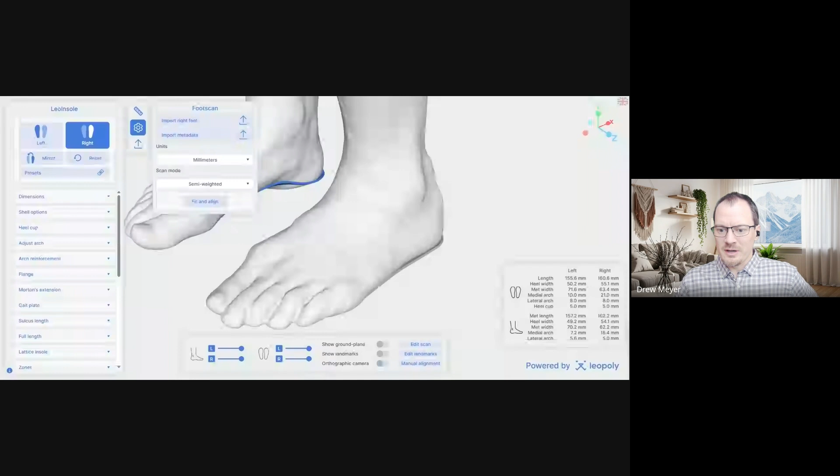For those of you not familiar with LeoInsole, I'll give a quick run through of the layout. I've imported a pair of foot and leg scans using the import dialog. It's really important to pick the unit of measurement for that scan file and also how the scan was taken. These were taken in a semi-weighted position, and then I'll double check the landmarks and make sure they're in the right location, because sometimes the automatic detection algorithm will miss one or two, and we want those landmarks in the right spot for the best success possible. Now that my foot scans are in, oriented, and all the landmarks are in the right spot, I can start designing.

One thing most customers start with is a preset. You can save any settings and make it your own preset, and import that later with the import yours feature here. I'm going to start with one of our presets to get things going.

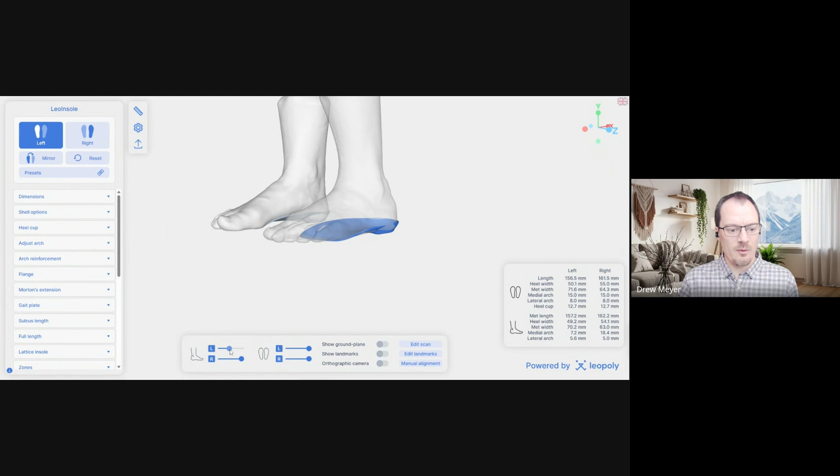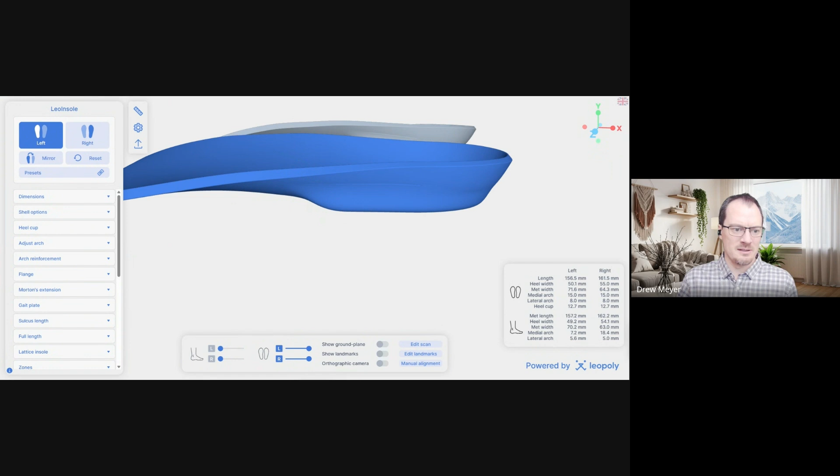This will highlight one of the new features that's been available for a couple of weeks now, which is the blended heel post. You can see we have this nice transition that's now a blended feature. It used to be a sharp, 90-degree transition like this, and it would fracture, especially on printed devices. This was big feedback from users saying, stop making this a 90-degree transition, we want a nice smooth round over here. So now with the new updates, there's this blended heel post, and anytime you add a post, it's going to have a nice blend to it as well.

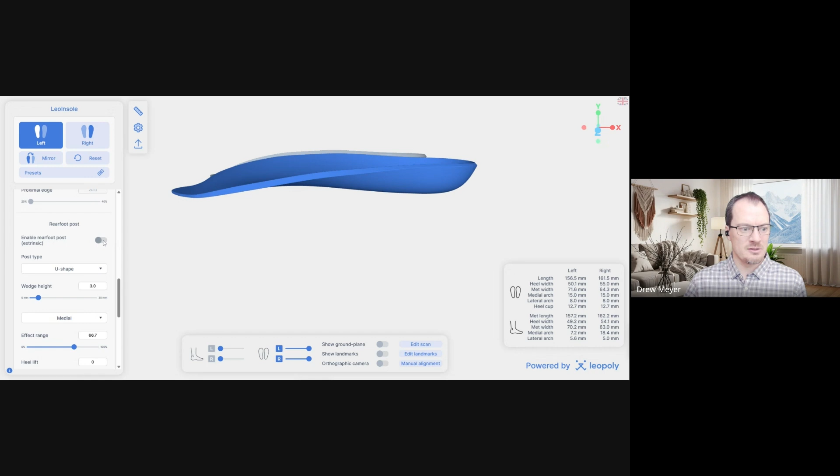This is located down in the foot posting category. I have a rear foot post activated, so if I turn that on and off you'll see what's going on. There are multiple shapes available here - this is the U shape, and you can also do it with a full block shape, which will also have the transition. Any of the half posts will also have that transition. This is one I'm really excited about for the 3D printing crowd especially, and it's going to show up on any of the heel posts. So now we have nice blended heel posts.

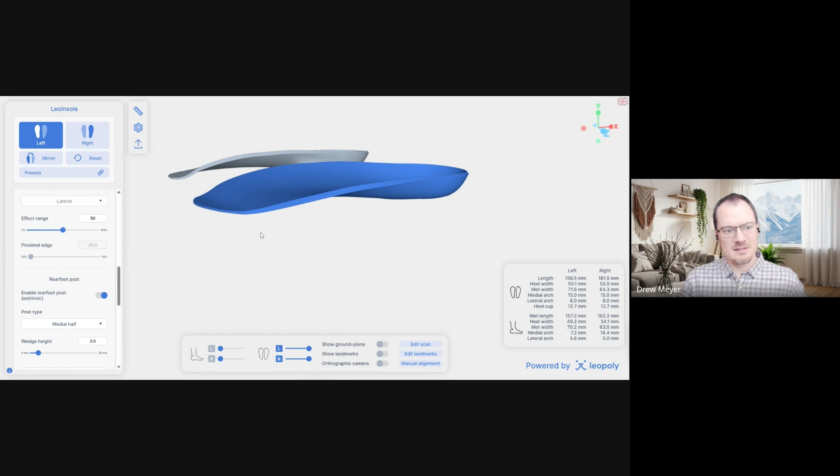All right, so for the rest of the features, I'm really excited to introduce some new things that have been added into the Dimensions tab here. So in the Dimensions tab, what we have are a couple of new features.

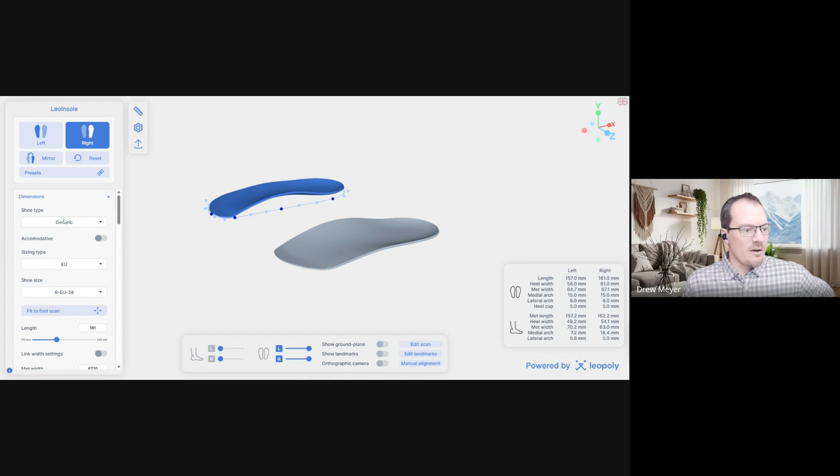The first one you'll notice is when I open the Dimensions tab, all of a sudden this outline shows up and these control points will show up as well. This is the ability to adjust the contours, the perimeter of the device.

This feature has actually been around for a couple of weeks now. Some of you guys may have noticed it if you're heavy LeoInsole users currently. These control points allow you to modify the shape of the device manually.

The first release of this allowed for only the top surface. So the clinical surface facing the foot was the first iteration of this tool.

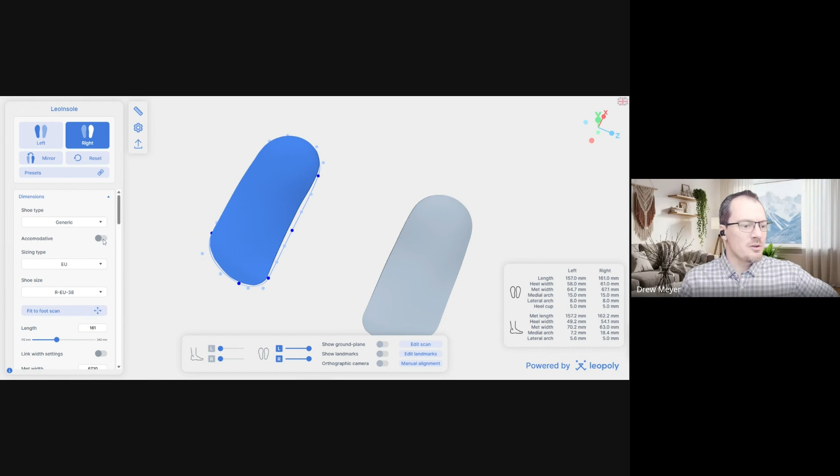But I'm really excited now we have the ability to, when you go into accommodative mode - so this is also a new change for us as well - accommodative mode is going to replace what was previously called the thick insole setting.

So think of this as the thick insole tool. You turn on accommodative mode, and now you get the thick insole.

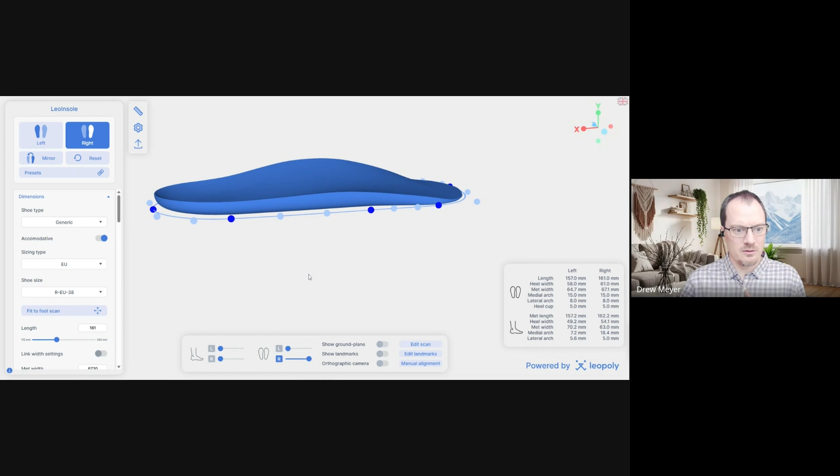I'm going to hide the other side here so we can just see this one. So when I turn on and off accommodative, it's basically that thick insole tool.

The other thing that will happen is you can see down here at the bottom, right now there's not a top and a bottom control. When I turn on accommodative, I now have contour editor top and bottom.

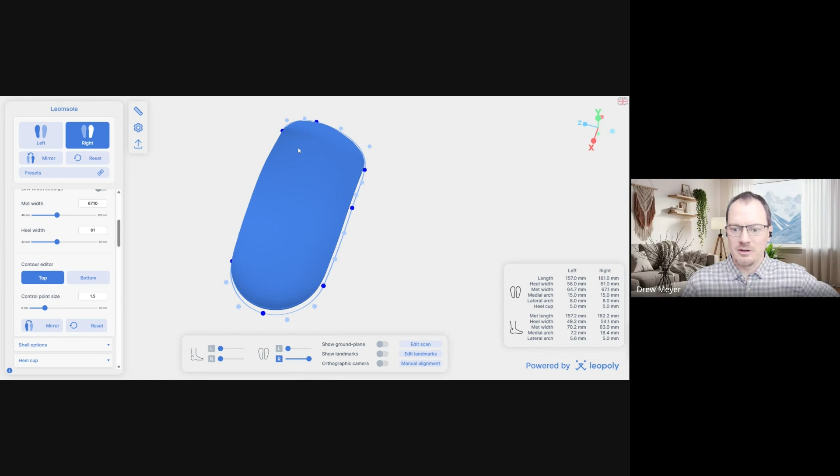So the top is going to use these control points to control the top facing clinical surface, the one that's touching the bottom of the foot.

The bottom, for those of you in the German market, this is going to be the brand sole. This is going to be the shoe-facing surface of the device.

So it will allow you to adjust the contours and how it transitions from that top clinical surface down to the surface that sits inside the shoe.

So this is really nice because now you can really finely control and you can grossly manipulate to match feet that don't really look like feet anymore. You can really manipulate the contours of this outline to match up with a foot.

One quick thing to point out is sometimes if you have a tiny little control point, it's really annoying and difficult to click on it.

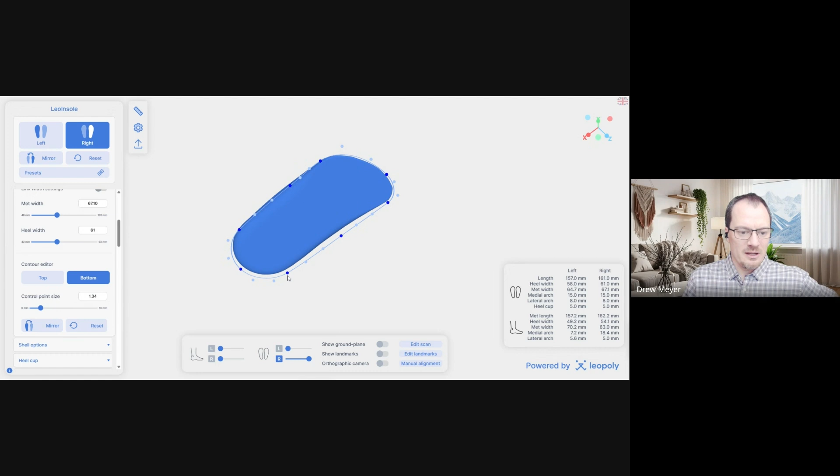So there is a control point size slider so that you can make the control points a little bit more easy to manage. Okay, let's jump into a real world situation.

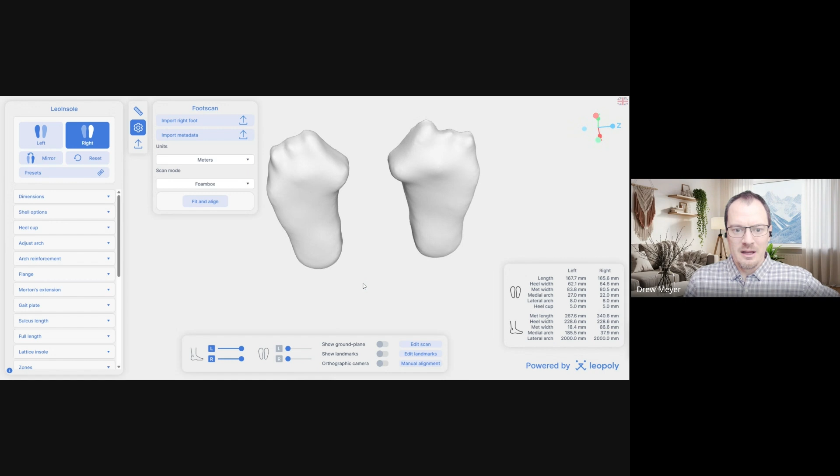I'm going to switch tabs here. And these feet don't match the typical foot profile anymore. We have a really extreme hallux valgus going on here, a really narrow heel and an extremely wide forefoot.

So historically speaking, this would have been a little difficult. You'd have to spend a lot of time with the forefoot width sliders to accommodate this.

Now what we can do, open up the Dimensions tab. I'm going to hide this side and just work on that right side. I can flip on accommodative mode. I'm also going to flip on full length mode. So this is kind of the template that we're working with now.

As you can see, as what typically happens with these really extreme hallux valgus situations, the great toe has translated so much and the width of the forefoot has increased so drastically that we have too much length and not enough width, although it's actually pretty close to start with.

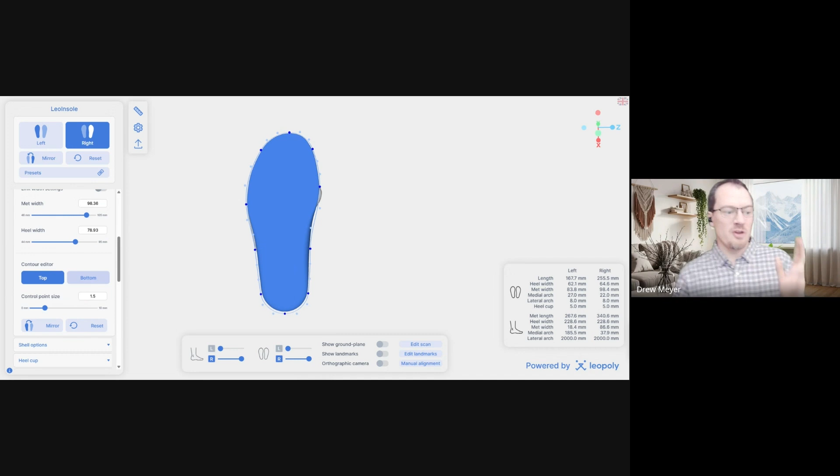So what I can do is go back into the Dimensions tab, and you want to be careful so that you know that you're editing either the top or the bottom surface. The top surface is going to be the one facing the foot - this is going to be the one that has to look like the foot.

So what I can do here is hide the outline and adjust the length of this to get to a more appropriate length. So let's say something more like that looks reasonable. And I want to make sure I'm in my perfect bottom view here.

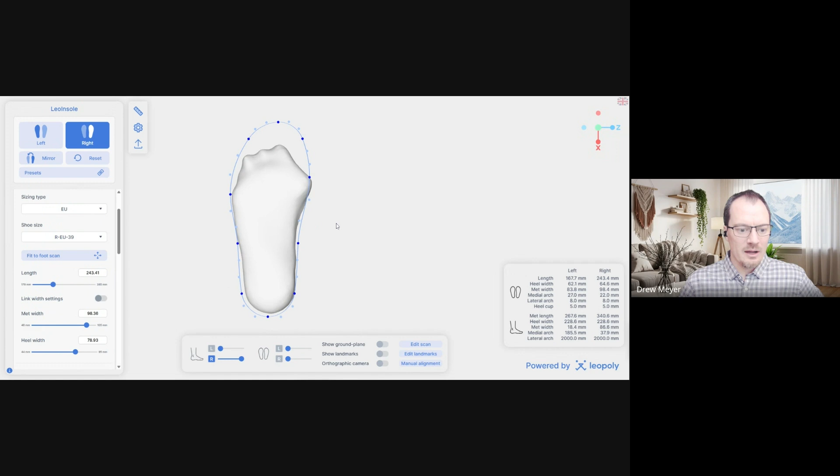And now I can start adjusting these control points. Sorry, it's going to run a little slow on the web call here. But I can start adjusting these control points.

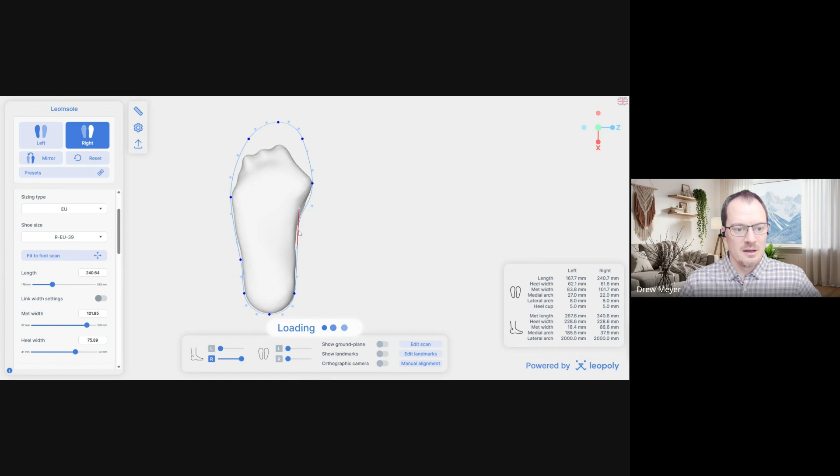So the dark blue points, I can relocate the outline, and the light blue points, I can change the rounding. If you guys are LeoAFO users, this is really similar to how the trimline tool, the outline tool, works in the LeoAFO space.

So now you can really customize the outline of this device to more appropriately match the actual foot. I can turn that back on, and now we can see that the overall contour matches the foot much better.

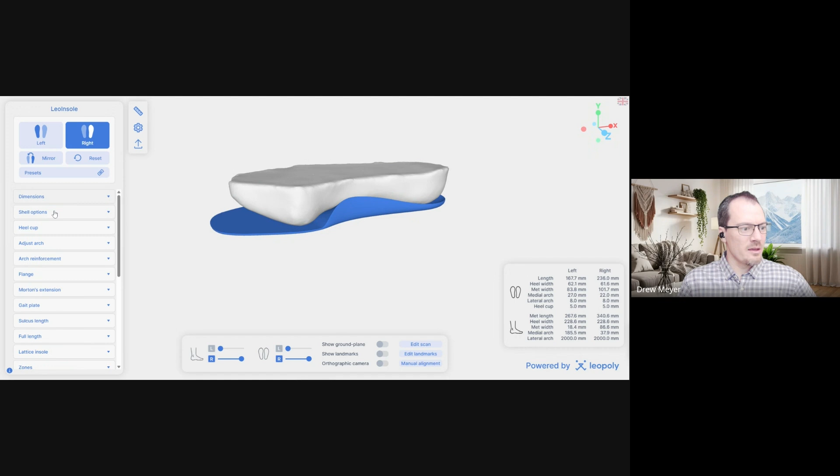Now let's say I was going to want to FDM print this. So I think I want to have a lot more thickness so that I can add some infill and make this nice and squishy for this particular patient. So I've added 8 mils, and 6 mils under the forefoot.

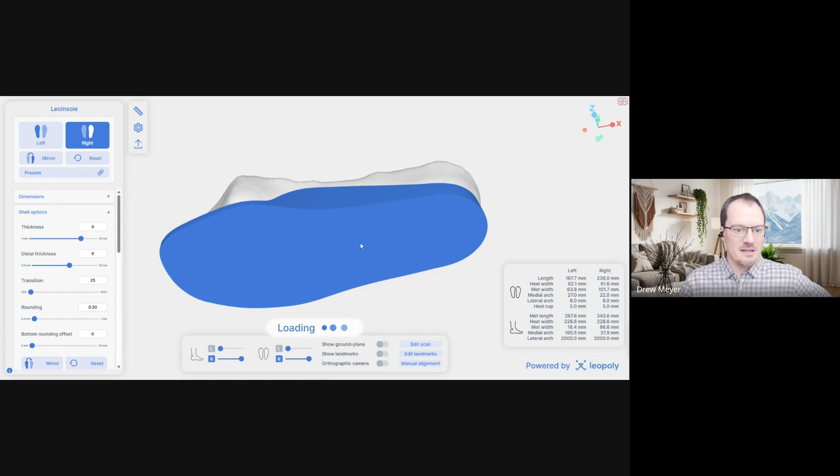Another new feature while I have this tab open is the bottom rounding offset. So if I set bottom rounding offset to 0, you're going to see that I have a square edge, and it goes all the way around the bottom of the device.

As I slowly bump that up, you'll see that it starts to break the edge, and then I can even do a really aggressive round over so that it has now rounded the edge, and it's going to fit into the shoe quite well.

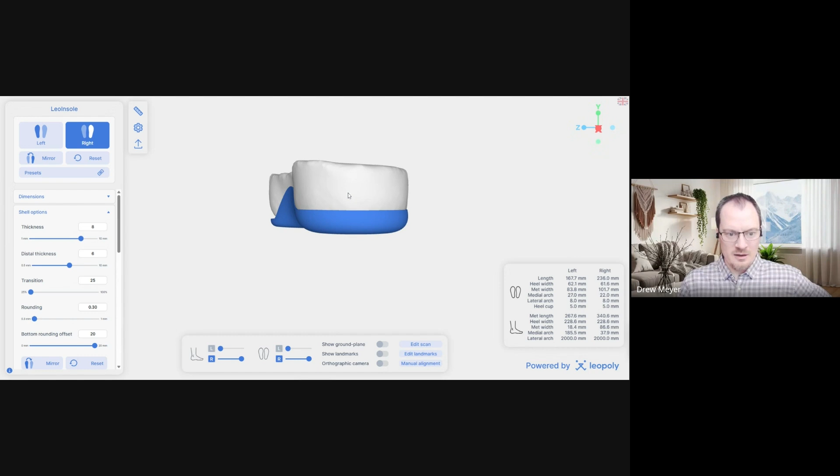So let's say I want to go maybe halfway, maintain some of that squareness and that support, but I'll keep a little bit of it so that it's not a complete square edge. So that's another new feature found under shell options.

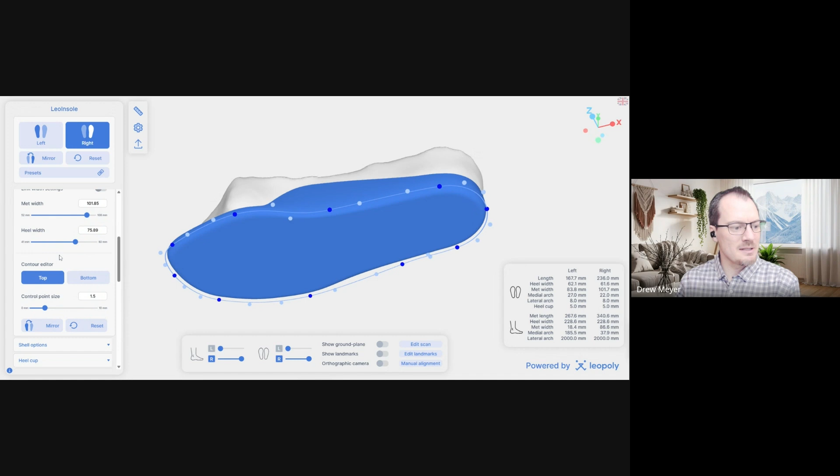If I go back into the dimensions tab, scroll back down to the contour editor feature, and now switch into bottom mode, I want to be in that bottom view, editing the bottom surface. You see now that the contour has changed when I switch back and forth.

So now I have 2 contour maps that are going to look really similar. One controls the top surface touching the foot, and the other controls the bottom going into the shoe.

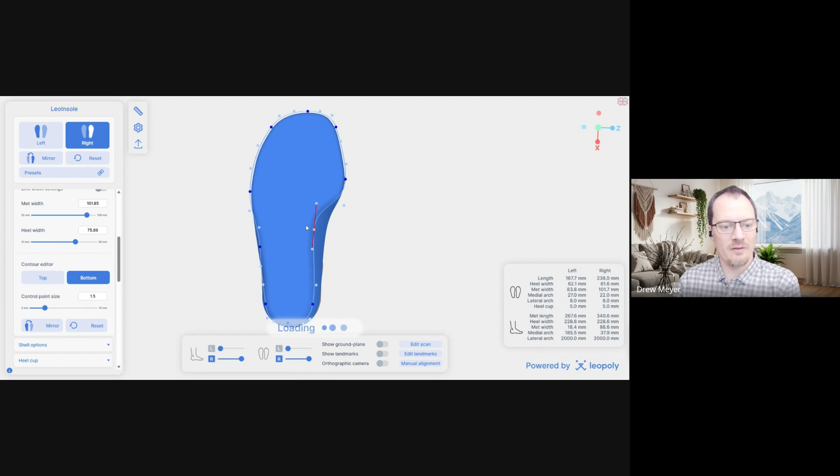So I can do this manually in a similar fashion. If I just drag these, it's basically controlling how my skive, or my curve, would look if I were to take this to a grinder. For example, if I wanted a really hollow arch, you'll see that if I drag it too much, I'm going to be exposing the foot.

So obviously I don't want to do it that much. I can get a nice hollow though, so I know this is going to have the minimum amount of bulk, but still preserve the contours of the foot and match into the shoe.

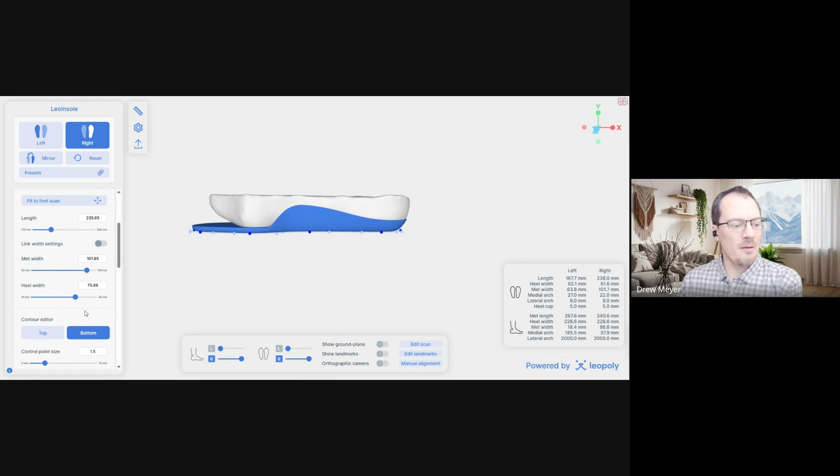So I can do this manually, as I mentioned, and for this extreme situation that's what I'm going to want to do. However, there's also another feature that's been introduced, which is the shoe type.

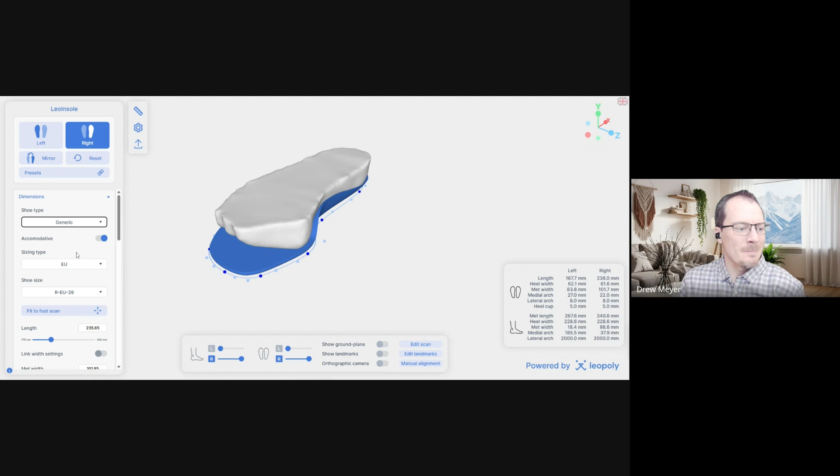This is going to be great if you're in a mountain market, or if you're serving ski boot customers or ski boot sports stores. There's now a generic, a ski boot, and a sport shoe category.

So that's one new feature, that you can pick a ski boot or a sport shape for your inlay. The other thing is the sizing. We've now added this - this was new information for me.

I'd never heard of this. So if you guys are already aware of this, more power to you - the Mondopoint sizing system.

Within the Mondopoint sizing system, there is a low, a high, and a medium, which are going to be the widths. So if I set a width, and let's hide my foot scan here so you can just see what's going to change - if I change from a 210 low to a 210 high, it's going to increase the width.

So all of a sudden now we have a new sizing system, Mondopoint sizing, for the ski stores, in addition to all the other sizing conventions that were already there. And if you're going to be making a ski boot device specifically, all that stuff is now available in here, okay?

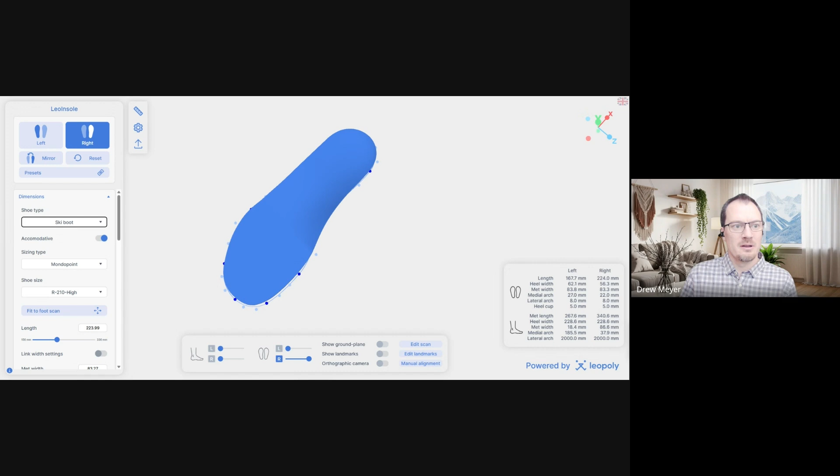All right, so shoe type selection, accommodative mode, the contour, the top and the bottom editors. I want to show that again because I think that's a really important thing, and I want to show it with one other set of scans here.

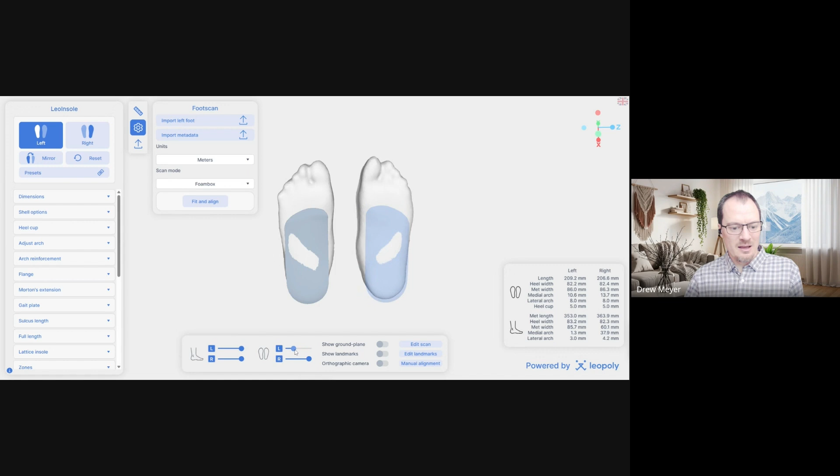So another scan that's been historically a little difficult for the LeoInsole software to handle was what I call the pancake feet. This is a really typical American presentation, unfortunately. It's super flat, super wide, really thick, with some sort of valgus collapse typically. You can see there's some navicular push out here and a little bit of abductovalgus going on.

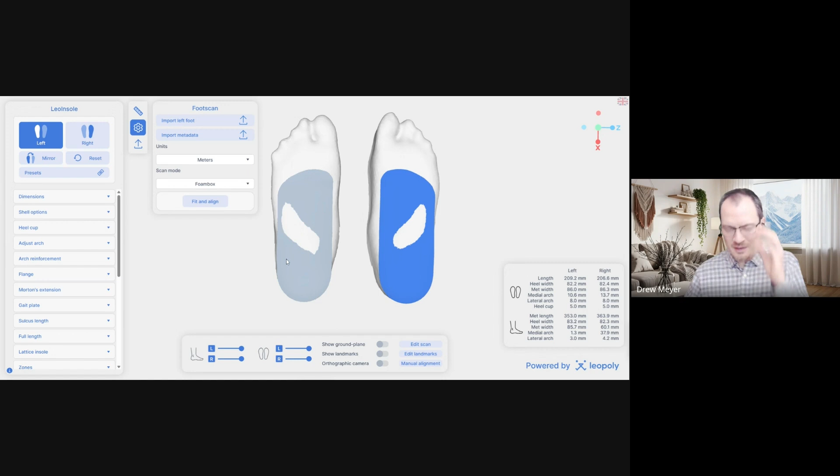Historically speaking, this would be really difficult for these kind of typical inserts to match to this shape of a foot, and you'd have to spend a lot of time trying to make it work, and it just wouldn't ever be as good as I wanted it to be.

So now we turn on that accommodative mode, and it can be done in the 3/4 length, it can be done in the sulcus length, or it can be done in the full length also. So let's say again we were going to do the full length.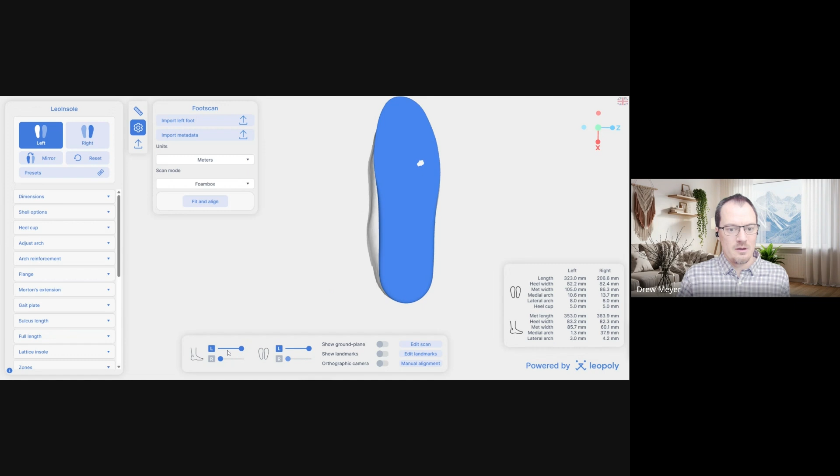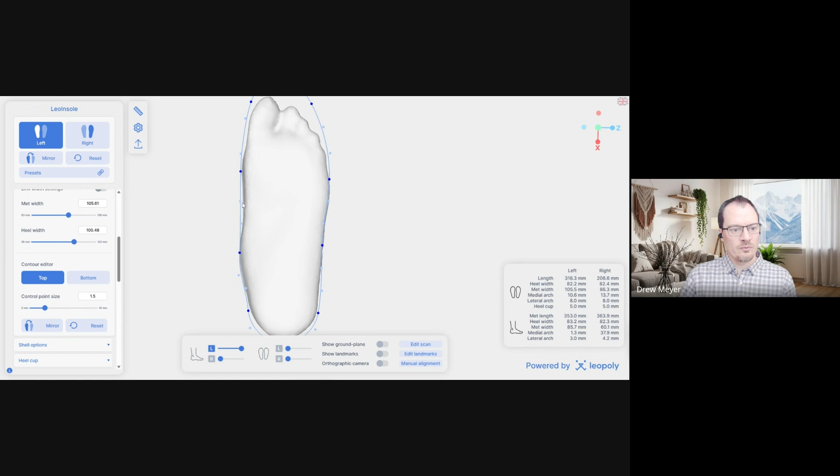And I want to match up the bottom. So the first thing I would do is make sure I have my length appropriate. And I want to make sure that I'm in top mode so that this is going to match the actual contours of the foot. Now I can blow out the edges here and reposition. With a little bit of effort, I can now get this to match much better to the actual shape of this foot.

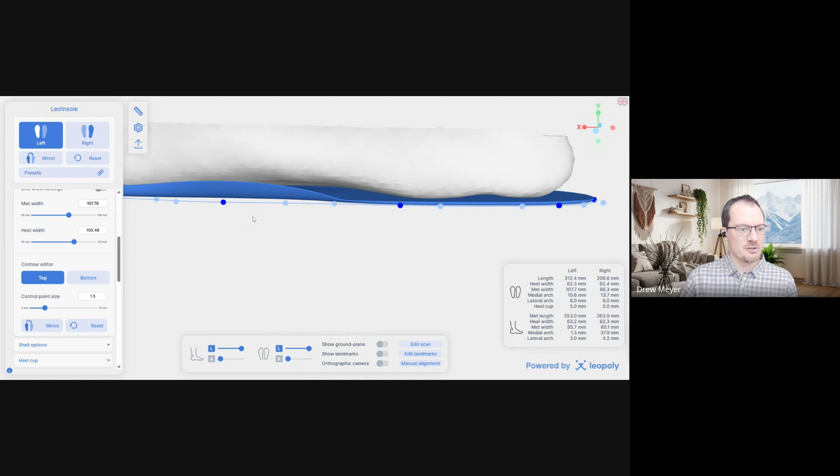One thing that happens from time to time is this situation too, where I say, well, I don't really have enough arch contact here, so how can I improve the arch contact? That's another one that's been one of those things that's been needing a boost in the ability to address how the arch contour can be molded to the foot a little bit better.

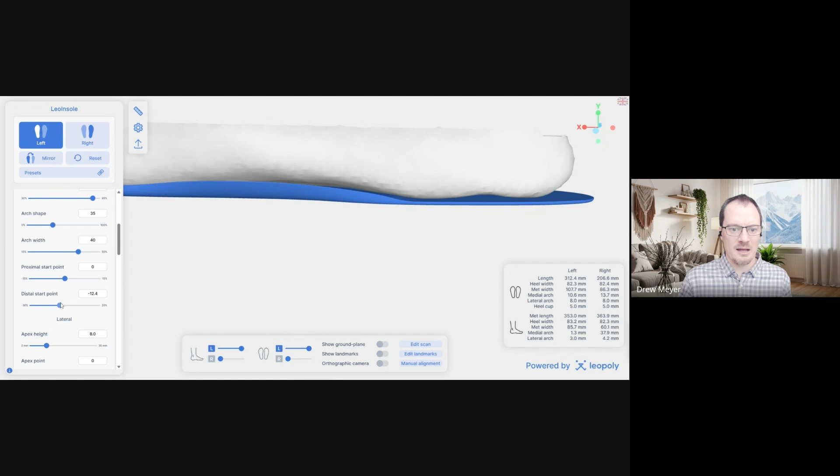So something else that was snuck in a couple months ago is the distal start point. With the distal start point, I can just start pushing that arch until I get it down into a position that looks like it has much better contact.

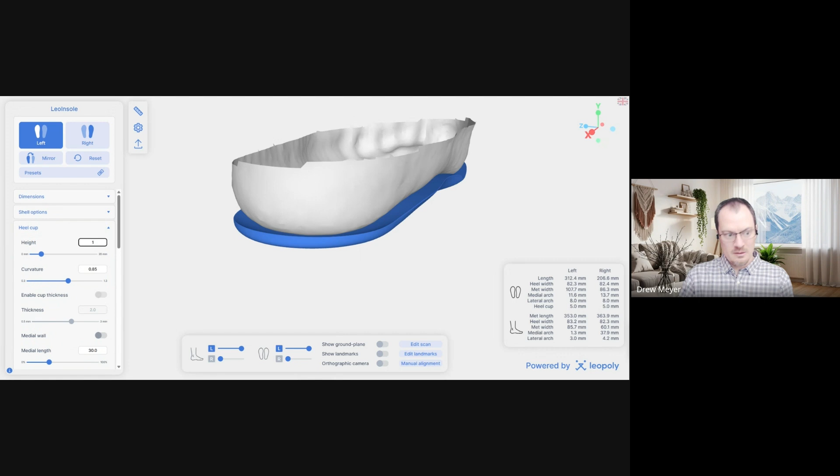And then with the arch shape and the arch width sliders, I can also change how this arch gets filled in and the arch height as well. So between all those things, I can hopefully get into a position where I say, okay, that looks like a much better contact across that arch surface there. And as always, I can add a heel cup.

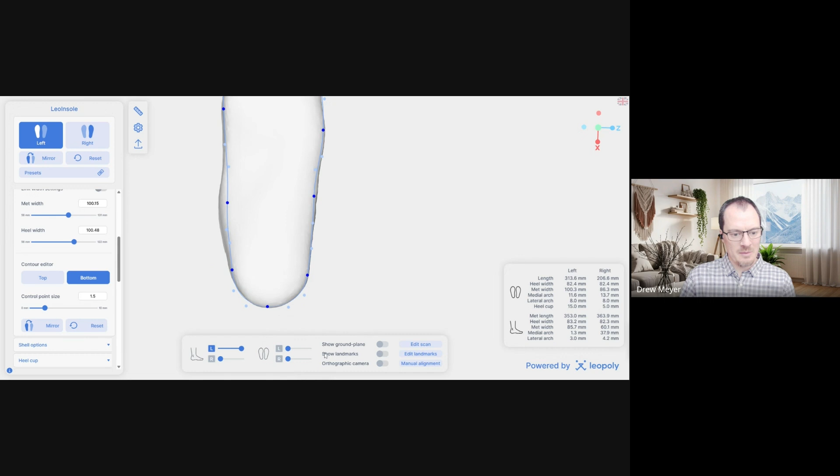Let's go ahead and see kind of what we ended up with. So now we have a really nice bevel that goes all the way around. And again, remember, there's that new feature in there for shell options. So I can even increase that more, where if I really want to round that over, or if I really want to have it a little bit more squared off for support, or just depending on your printer settings, if you don't want to have too much overhang, you can change how that feature is going to look.

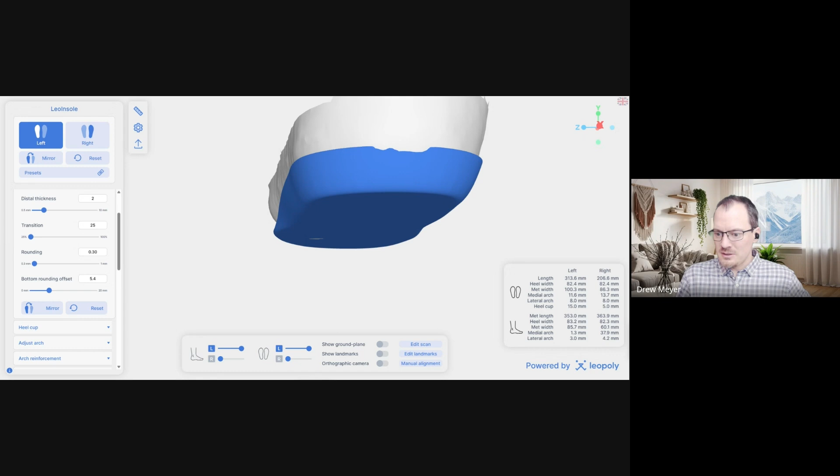Okay, so that's some of the new sizing. Oh yeah, one other thing that was added recently is the ability with this mode activated. The flange tool used to be something that was not allowed because the geometry would interfere. So now what we can do is add a medial flange, and this is a great example of somebody who would probably benefit from one of these flanges, to have some better contact on that medial kind of collapse there. And maybe that's a little too high still.

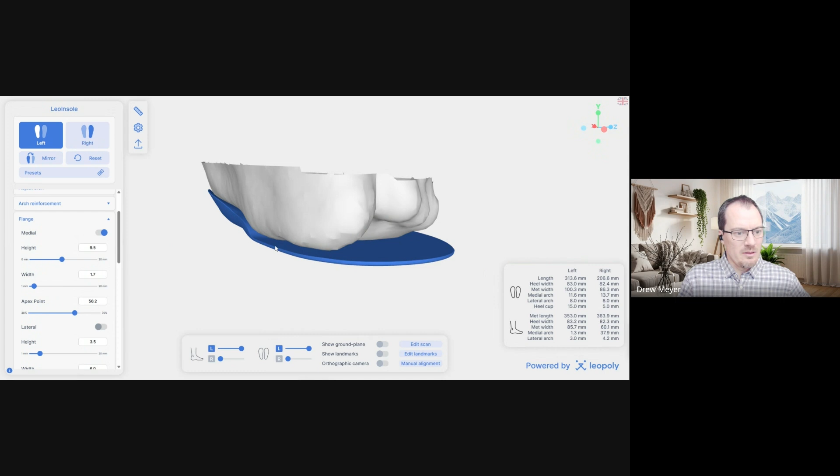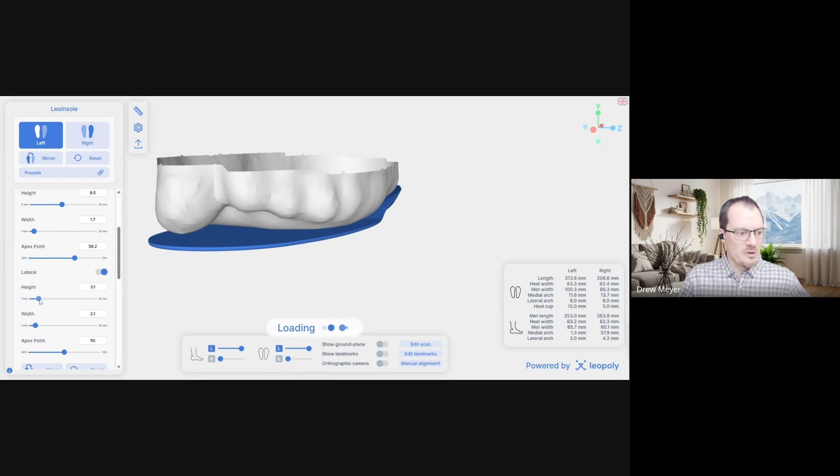That is now the medial flange tool, and the lateral flange tool is also available in the accommodative mode. So we can go ahead and add both of those flanges in as well.

One other thing that was a constant feedback point - we try to take in the feedback real users are giving us and make improvements as quickly as we can. One of the things was regarding length reporting. Down here in the lower right-hand corner is the automatic measurement box. Previously, the way length measurements were reported, it was sometimes easy to get confused as to what the true length of the device was.

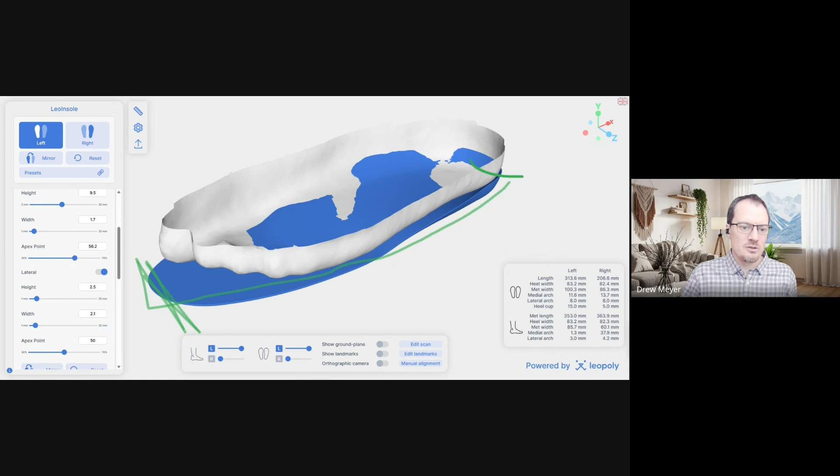Now, if you look here at the length section, you can see an actual measurement for the length of this device. That's going to go from the front to the back - that full length measurement reported right here. So if I turn off the full length, you'll watch that length value drop down, and that wasn't necessarily the situation beforehand. Now there's going to be an actual length reported, so that if you're shooting for a specific measurement or a specific shoe length, we're going to have a much more accurate representation of that.

All right, any questions? Let's see here. Mark, your question - what materials were you suggesting to print these devices?

Great question. There are many choices when it comes to options for printing here. I've seen a little bit of a convergence, I think, in the industry and in what many of our customers are using or recommending.

On the FDM side of things, there's definitely a convergence around TPU. TPU is pretty amazing, and there's different types of TPUs. It used to be that TPU was a little more of, oh yeah, I just print in TPU, and there's only one or two options available. Now there's a whole spectrum even within TPU. There's foaming TPUs that are expanding, and that's a whole can of worms. Then there's the non-expanding ones. There's also different densities of TPUs.

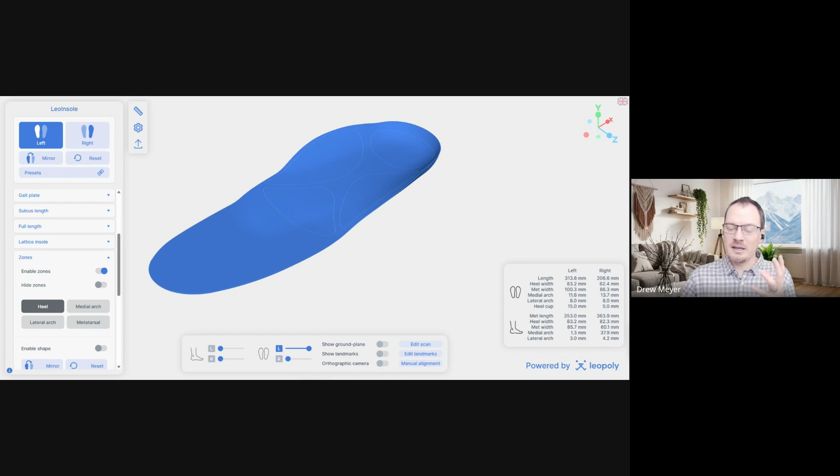There's a beta version that's going to be available sometime next week that will have these updates that I'm showing you today. If you're interested in that beta version, please let me know in the messages in that lower right-hand corner and just say, hey, I'm kind of curious, and we'll try to reach out to you to get you that beta so you can start seeing and using some of these features.

Something that's been changed in that beta version - now that the thick insole tab has been replaced by the accommodative toggle switch, the zones tab is a little bit cleaner. There's not an overlap with the thick insole with the zones, which was a little confusing.

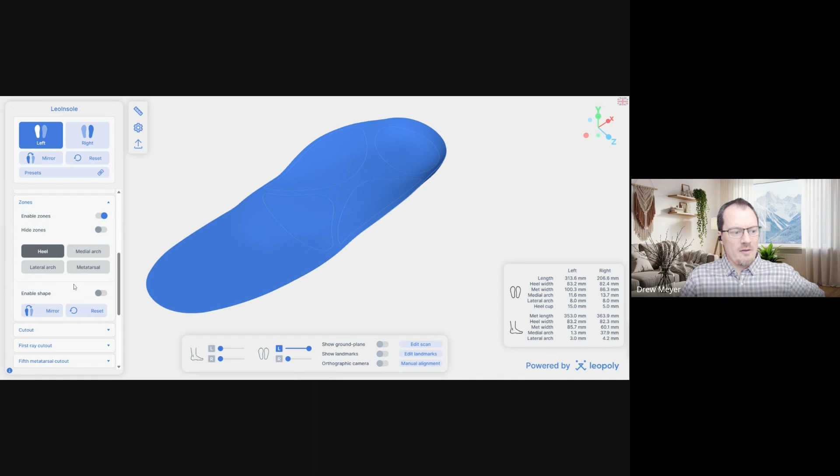So the zones tab - when you turn on and enable the zones, right now everything is grayed out, so no zones are actually active. I have to pick one of these zones. Let's say I want to do a medial arch zone. When I enable it, it now turns white. So any zone that has been enabled and is active when you do your export...

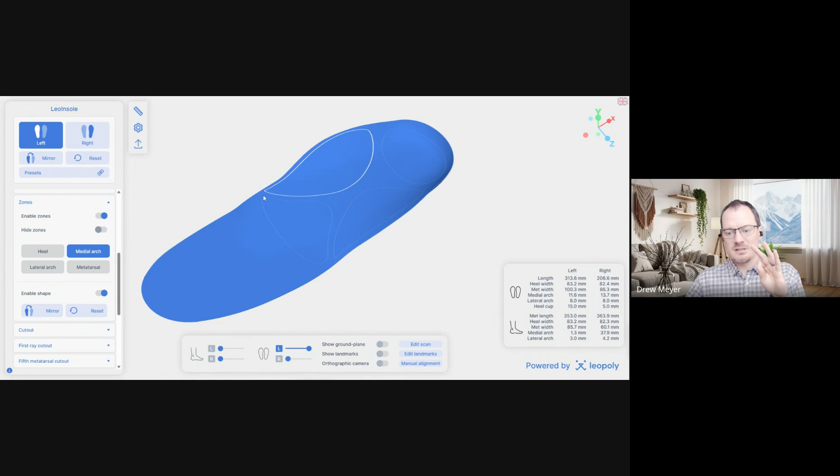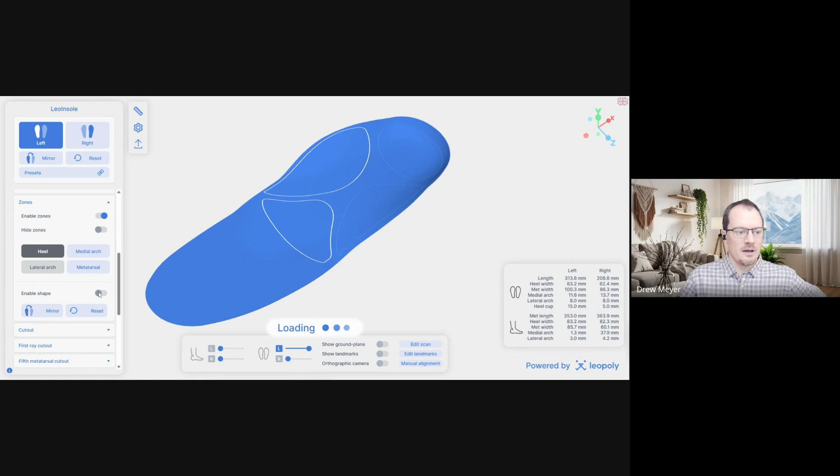If I go and export this right now, what I will get is not just the left and right STL in the zip folder when I download it - I will get the left STL minus this zone, and then this zone as a separate geometry. So any zones that are active, if I turn on the met zone, if I turn on, for example, a heel zone, I could basically export each of these as separate geometries.

In my exported zip folder, each of these zones will be separate files. That's important because if you're going to FDM print this, you can take it into a standard slicer like Orca and use these as modifiers. When you import them as modifiers, you can set different infill densities so each zone has a different metamaterial property - for example, a super soft density under the heel, a more supportive density through the arch, and a nice soft density at the met pad. That's how we recommend using the zones.

Later, it's our goal to let you do some latticing in the software with a bit more control - right now there's only one lattice option available. But presently you can export these zones as a 3MF file, and all that information will be contained in that one file. Depending on how savvy you are with your slicer and what equipment you're using, that will change a lot of what's possible, but just know those options do exist.

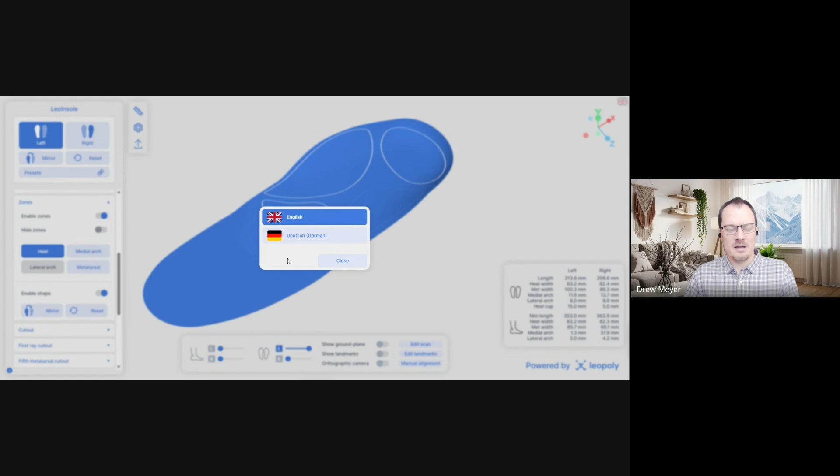Somebody else asked if there's a French language option. There's not currently - we have English and German. You can see the Union Jack at the top right representing English mode, and you can switch to German. I'm sure it would be possible for us to add French, but we might need some help translating, so let me know if that's important to you and we could probably make it happen.

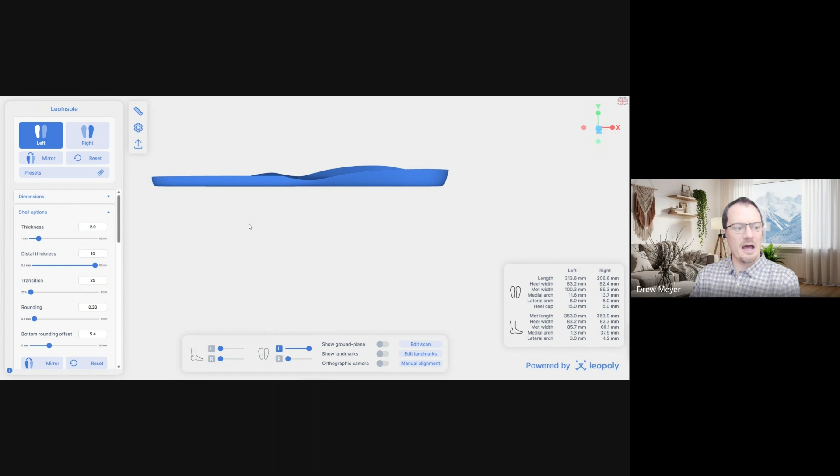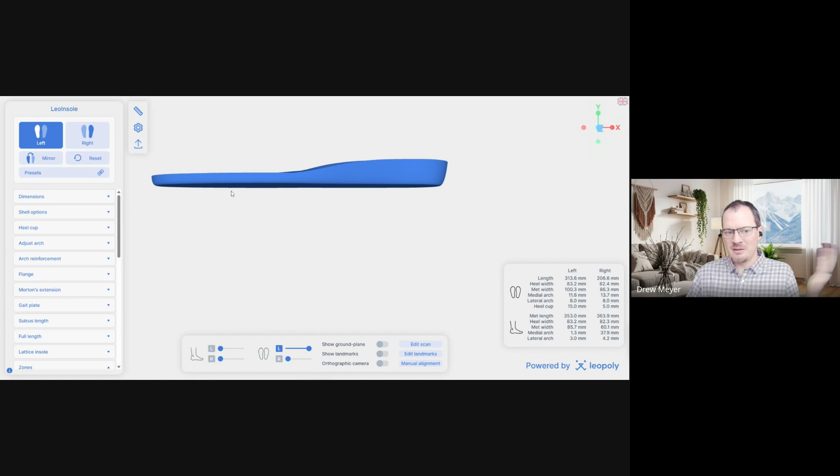To go back to Mark's question about materials, I think what I'm seeing is a trend where these thicker accommodative insoles, especially if you bump up the shell thicknesses to something like 8 and 6, you actually have some material to work with. If you give yourself material to work with, you can do infill that makes a difference and has clinical relevance. If you have like 2 millimeters of material, you can't really do anything meaningful on most FDM machines - going back to the more, funny to call it traditional now, 3D printed really thin styles.

Just to show you some examples of what's possible - this style, hopefully you can see it, is printed on a powder bed printer in PA11 or PA12. Really strong, crazy thin, very lightweight, with incredible details. You can see the text, you can see the reinforcement bars. Powder bed printing on an SLS or MJF machine can really yield some amazing results.

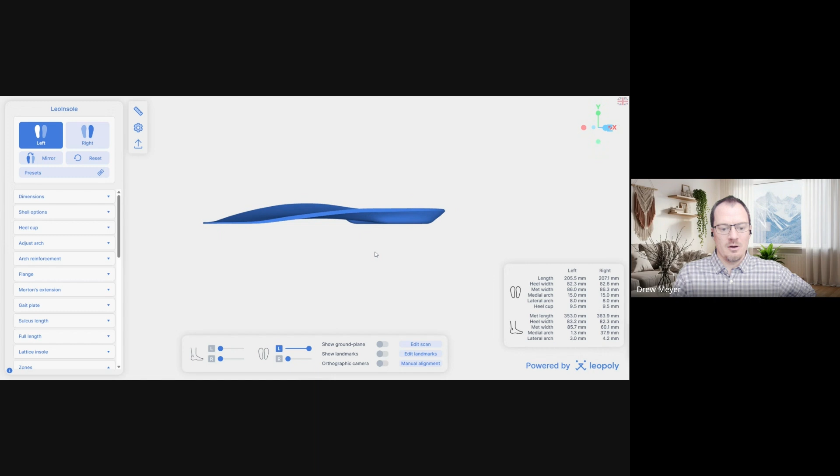In my experience, prices are coming down. We have some US partners who will print a pair of these, for example, in the $30 to $40 range. If that's interesting for you, let me know and we have connections that can make that happen. I know Formlabs recently opened a print-for-service campaign where you can just send them files and they'll print it for you - that's another great option to get the thin, hard nylon shells.

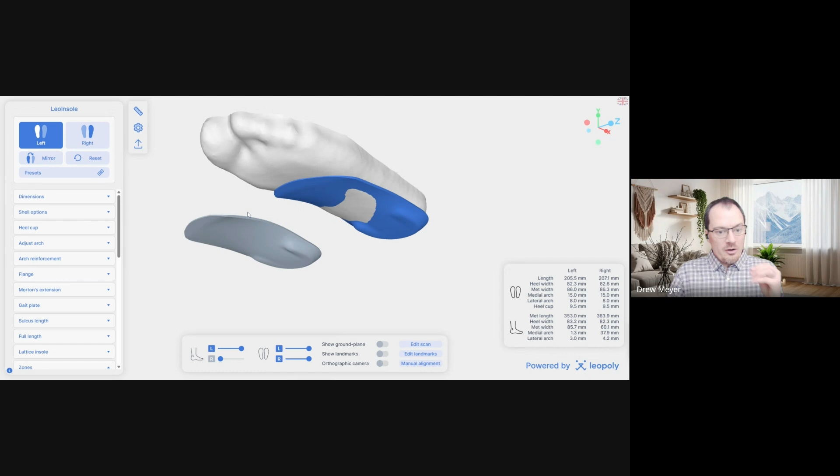Other options - in the FDM space, there's the do-it-yourself category with something like a Bambu Lab machine. We also have a version of this software directly integrated with a belt-driven FDM printer, where you can basically hit send to print. It will take the file, take the predefined zones, let you assign density values, and send it to print. You don't have to worry about slicing, print queuing, or loading and unloading the printer, because it's a belt-driven printer.

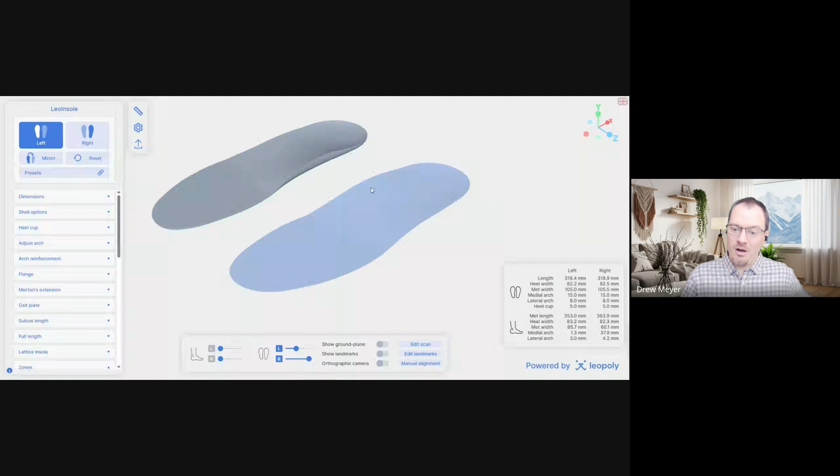If that's interesting for you, it's a highly automated, intelligent workflow where you can use LeoInsole to design these shapes, customize them to foot scans, and then as easily as sending something to your inkjet printer, just say send to print and it will go onto the belt printer. Right now that's available for offsite printing only, as a print service. But hopefully in Q3 and Q4 we'll have it available on site, potentially at your office or lab - let me know if you're interested in that.

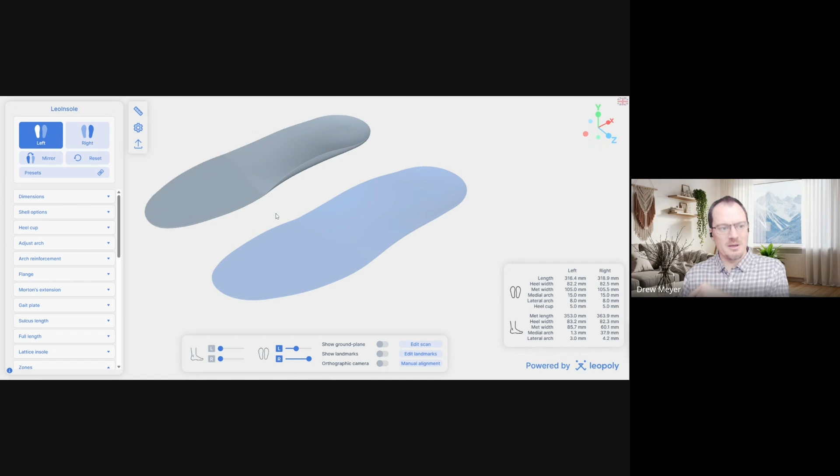Right now, the current LeoInsole you have access to will look basically the same, but it will have the zones and then the lattice insole tab. This slightly newer version, which will be updated in beta mode next week, will have just the zones tab by itself. Hopefully that makes sense. If not, let me know, shoot me an email.

All right, I think I'm all out of new features to talk about.

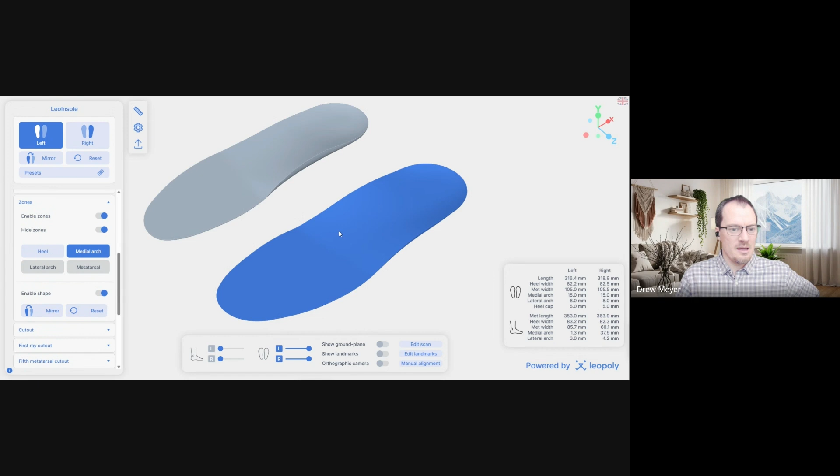Somebody else asked, can you alter the shape of the zones, for example offloading a dropped navicular? That is a great question. Unfortunately, the current answer is no. The zones we have are predefined according to these shapes, so there is not presently an ability to customize these zones. However, let's see if this makes sense here.

Give me one second, I'll see if I can demo it live with our new contour adjusting tool. Let's pretend this is your dropped navicular, it doesn't take much pretending because that's pretty much what's going on here, but obviously it can get more extreme than that.

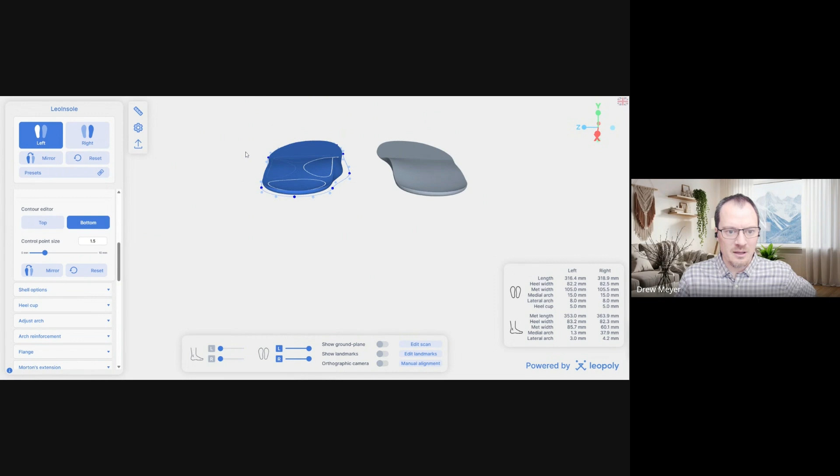As I move my contour out, let's see what happens to our zone here. So it didn't update as much as I would like, we'll work on that. I'll see if we can figure out a better answer for that, because actually, you know, this is why you have to be careful with the top and the bottom. Let's try that again, I think that should update.

Give me one second here. I was updating the bottom, not the top surface. So if I update the top surface, now we can see that the zone has expanded outward to accommodate that. If I make a really extreme adjustment here, just for demonstration purposes, there we go. Now you can see the zone has expanded to accommodate that. So you can manipulate the zones based on the contours, let's put it that way. Hopefully that'll be a good enough answer to get you what you need.

All right, any other questions?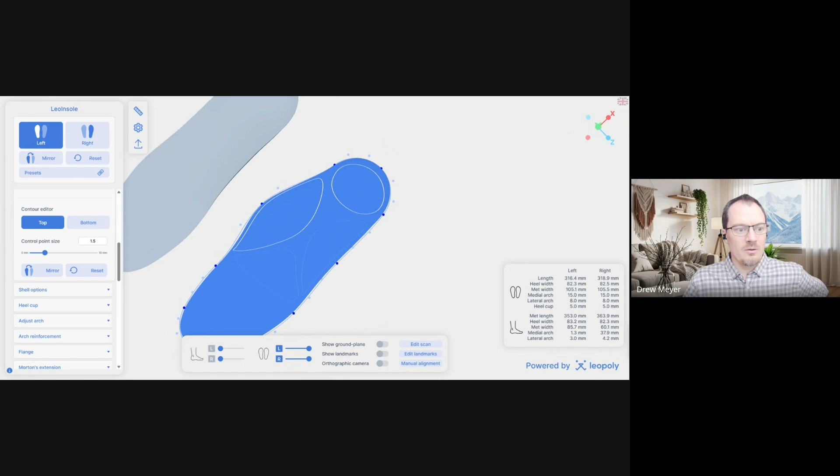Is there a limit to the degree of medial hindfoot wedging you can add? And also, can the forefoot be balanced in line with medial wedging? Great question. Let's go to this tab to answer, and we'll pull up a preset here so we can see what we're dealing with. So the question was about medial wedging, posting, all sorts of fun things. The foot posting tool has forefoot posting and rear foot posting.

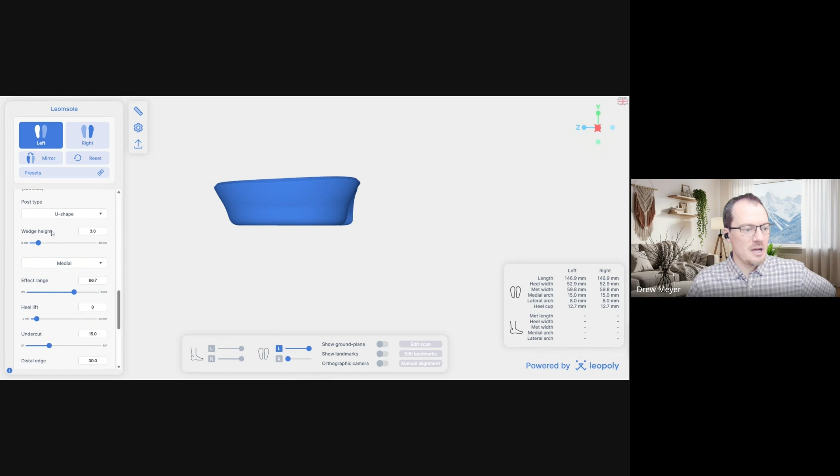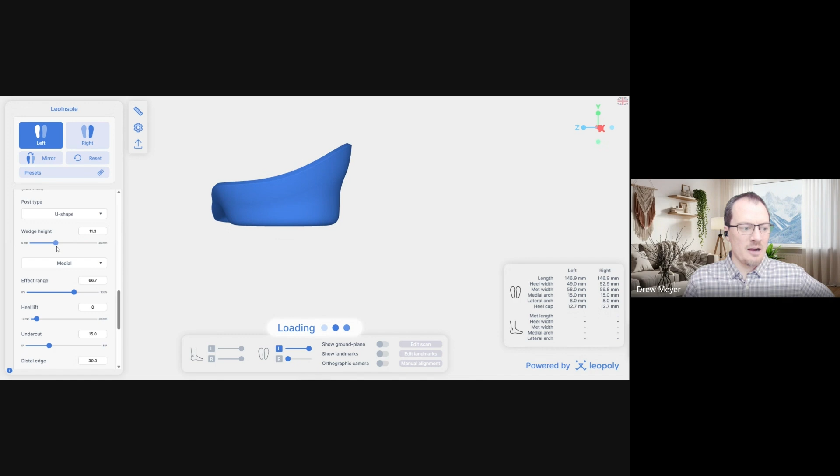Under rear foot posting, you can pick the shape of the rear foot post and the wedge height. Right now you can see there is a slightly taller distance over here than over here, so we have a medial post going in this direction. As I change that wedge height, the limit has actually been updated recently to allow a much higher limit. It used to be capped at, I think, 10 millimeters, now it can go up to a full 30. So if you want to get crazy and do some really supportive rear foot posting, you can go up to 30. You can also pick which side that posting is applied to, whether you want a medial or lateral posting, you can change that here.

Then the other question is in relation to the forefoot posting. So if I reset everything here and go to my forefoot post, I can enable a forefoot post, and it's going to post it like this.

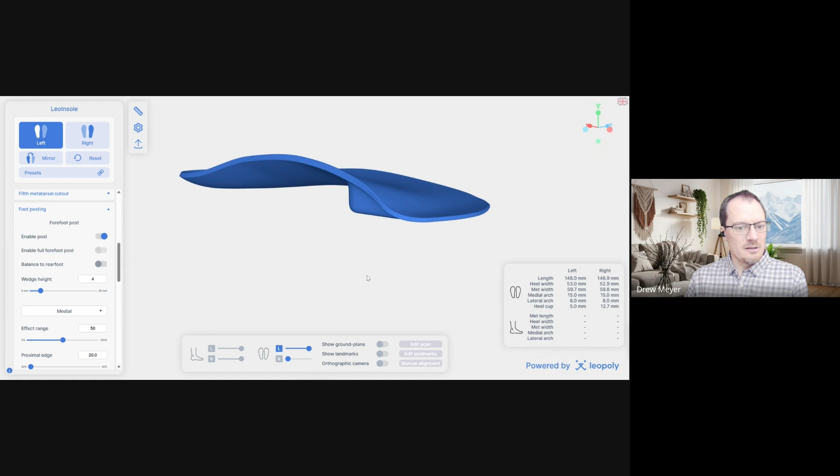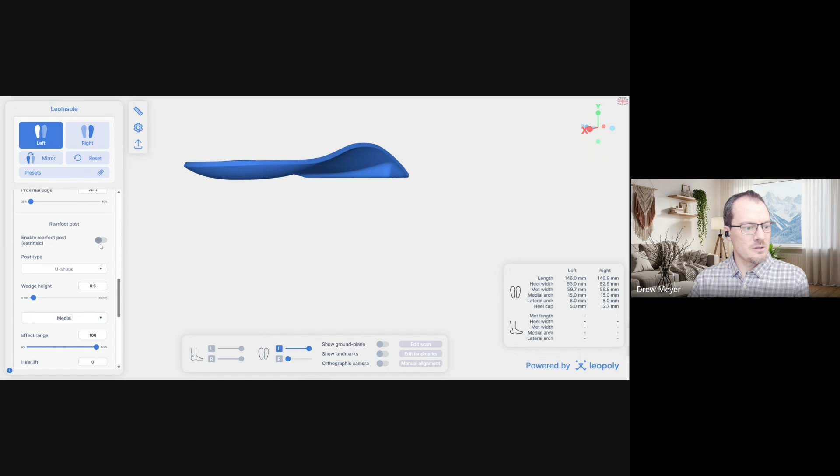If I change the wedge height, let's see if I can show you what that's going to look like. The wedge height will adjust like this, and I can do that in a way that it is balanced to the rear foot. So as I change my rear foot posting, it will also change my forefoot posting. Let's turn that on so we can see what's going on. And as I change them, they will stay together.

If I want to decouple them, I can turn off balance to rear foot, and now I can set the forefoot independent of the rear foot. So I could pick two different values for the forefoot and the rear foot. Hopefully that helps answer your question there.

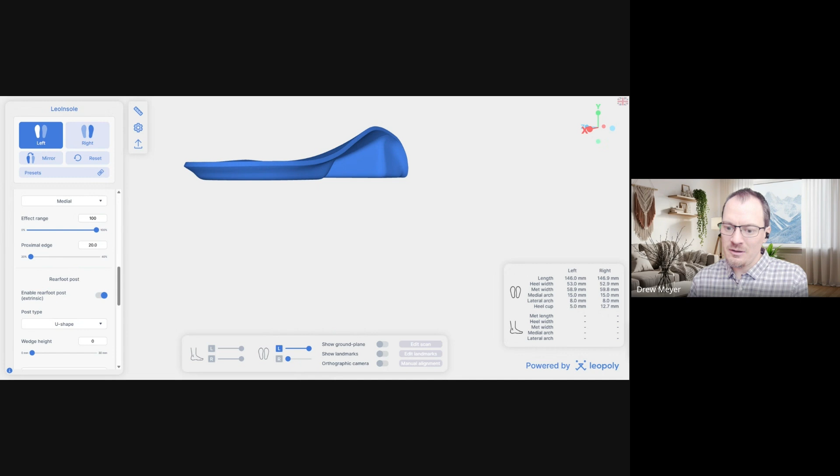I like using the navicular depression setting. Can that be combined with the zone? It certainly can.

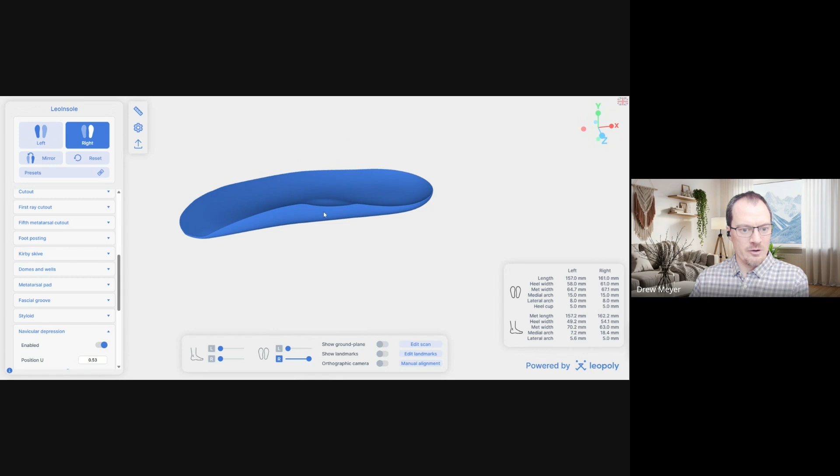Let's switch back over here and see if we can highlight how that works. I'm pretty sure, if I understand your question, you can turn on navicular, and that will give you the little divot there for your navicular. We can then turn on zones and do arch, for example. And then if you wanted to...

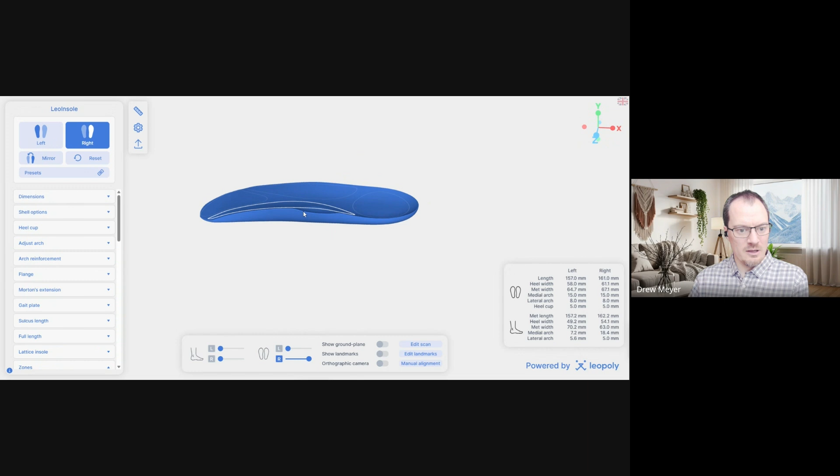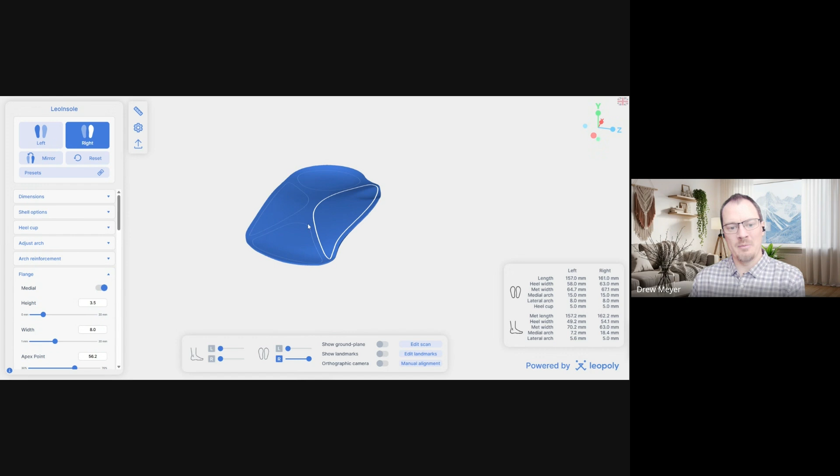Also change, like say you had a navicular and you wanted to bump that out, you can now have the navicular relief in addition to the zone. So this whole zone will be sliced separately if you wanted to do it that way. And then the contour to accommodate whatever navicular deformities are there as well. Also the flange should work with that. So if you need to really get some material out and under a really bad drop navicular, you should be able to accommodate most situations with those combination of tools.

All right. I think that's it for the questions. I think that's it for the new features.